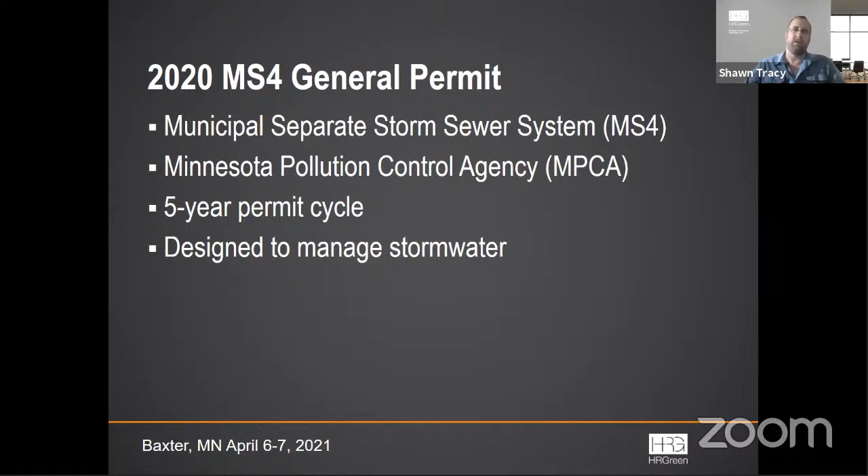So the permit, or SWPPP, contains a set of tools and programs designed to meet the permit requirements. The foundation of that is your city code. You've got a great city code - it meets the vast majority of the requirements. The only thing it's not meeting is the new requirements, which you'll have a year to address. They're very minor changes to your city code. The city code just lays out the regulatory language for erosion control, stormwater treatment, illicit discharges. It's got information for how you respond for enforcement of non-compliant projects within the city.

Currently, Baxter's not required to address any impaired waters. That's also part of the application process. The Mississippi River was recently listed as impaired for sediment. That listing came after the release of the permit application, so you're not on the hook this year for the next 5 years for addressing that portion of the permit, but 5 years down the road you will be. There's a little bit more to the application process that goes into that, but I'm not going to dwell on that right now. Suffice it to say, you want to be prepared for that for when the time comes.

The important takeaway about your SWPPP plan is that it's comprised of 6 what are called Minimum Control Measures, or MCMs. They're really designed to guide the city staff through various processes to meet the intent of the permit.

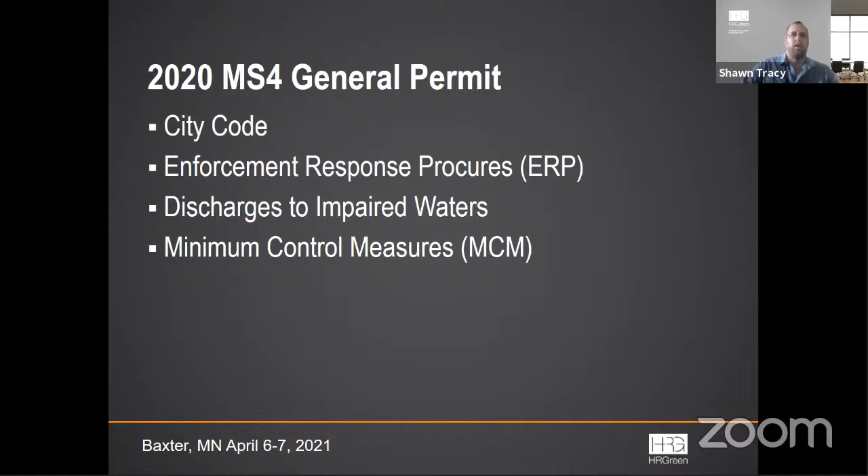There are plans for education and outreach to the public on stormwater related issues, a plan for getting annual feedback from the public on your SWPPP, and a requirement that the public has an opportunity to review and provide comments.

There's a plan for documenting the most likely sites and land uses that could generate illicit discharges, and that plan also addresses how to manage them. Think of your public facilities, buildings, etc., wherever you house likely pollutants, and how you apply things like road salt. This goes into MCM 3 for illicit discharge detection and elimination.

The other 3 plans relate more towards construction site plan reviews and inspections, site plan reviews and inspections related to permanent stormwater BMPs like stormwater ponds. And then the last MCM, number 6, has everything to do with plans for additional inspections and management of municipal facilities and stormwater structures within the city of Baxter.

Each one of the MCM plans provides essentially an introduction describing the intent of the MCM, along with specific details such as standard operating procedures and inspection content, what you need to be inspecting, and how you document what you need to be documenting, so that when you do your annual reporting, which is part of your SWPPP requirement, you have right at your fingertips all the information you need for your annual report, making it more efficient for you.

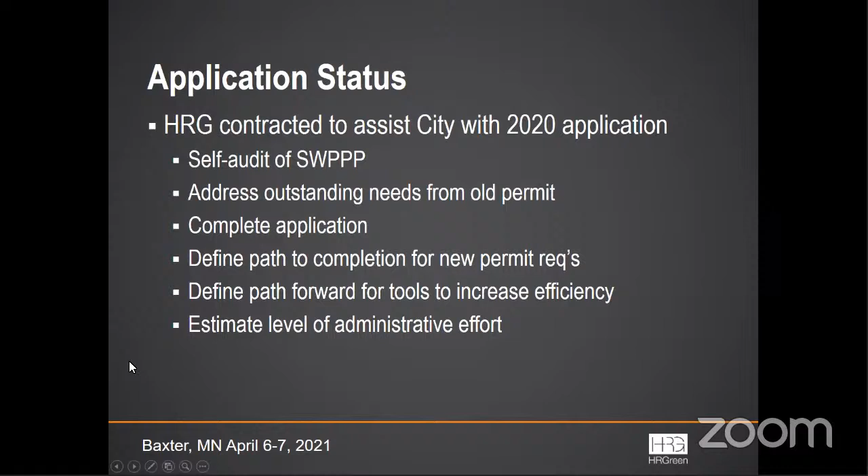This next slide shows basically the process of the application.

So far in this process, as I mentioned, we've all sat down with staff, and I've also worked remotely on addressing a lot of these things. The MCM plans, you didn't have a lot of very explicitly defined plans, so we worked hard to develop a plan for each one of those MCMs.

You should know that the city of Brainerd donated theirs as sort of go-bys, and we're working in tandem with Brainerd on a lot of these things with the city of Baxter. So there's some uniformity, some standardization between the two cities in some of the content, and in particular the MCM plans, or standard operating procedures, are a great example of that.

So right now we're at a point where the application is completed, ready to be submitted. The application deadline is the 15th.

What'll happen then is the MPCA will review it, address any concerns they may have with the application content, then we respond to it and resubmit if there are any comments. It'll go on public notice for 30 days after that point, and then the MPCA will make a final determination of the permit and initiate the activation of the 2020 permit.

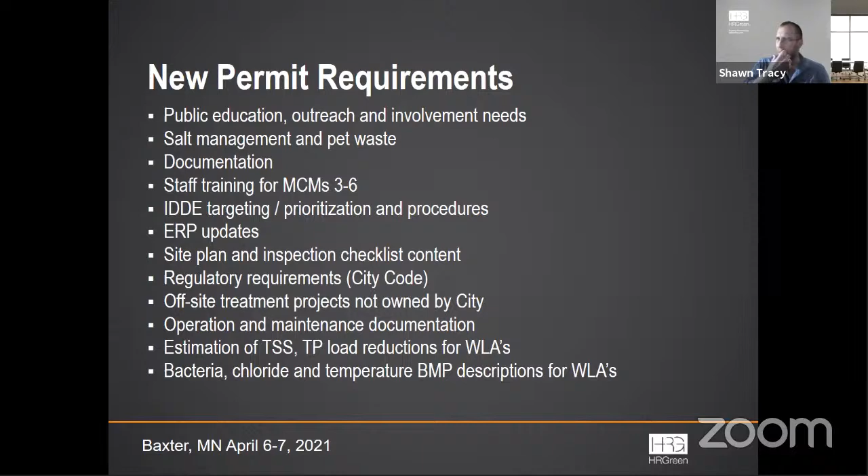The next set of slides focuses in on the various MCMs. There's a lot of content here, and I do not expect you to follow all of this. The take-home message is to illustrate that the staff and I have worked together to develop a work plan, an implementation plan of various issues we need to be doing, either for our SWPPP development or for when staff needs to go out and do various activities related to managing the program. You should have a copy of this and can look at it in more detail if you like.

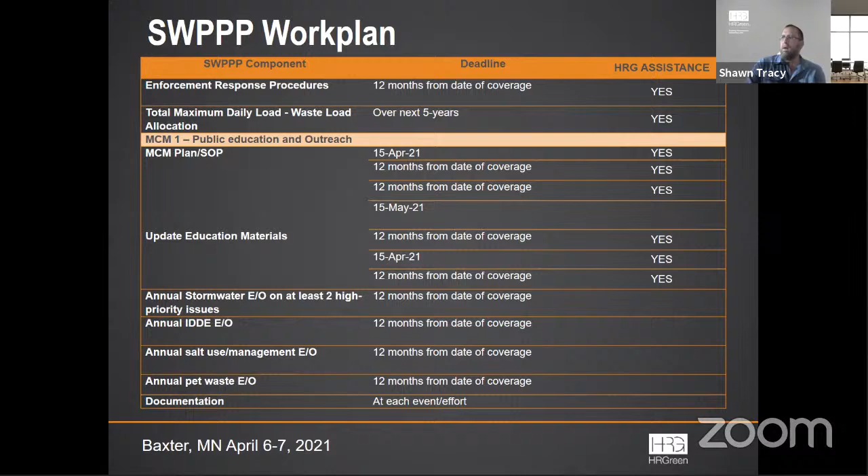So there's MCM1, the public education and outreach. There's various items there, components with deadlines. Some need to be done before the submittal, and that's already been taken care of. Some we want to get taken care of right away, like you'll see a May 15th deadline. The vast majority, though, are going to be related to items that can be addressed over that 12-month period to come into compliance with the new permit language. Again, the take-home message isn't for you to understand each one of these items, but to begin to understand the level of complexity and all the various moving parts related to managing an MS4. It's not a small task. There's a lot of small things, a couple of bigger items that require diligence in keeping track, documenting, and implementing.

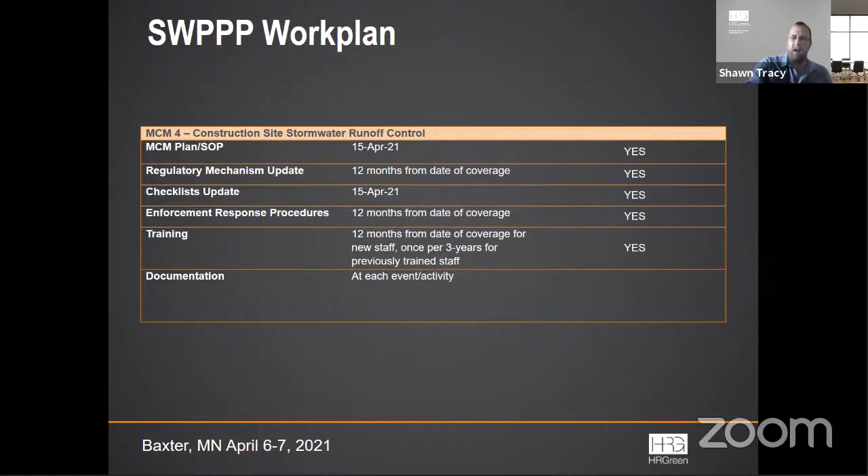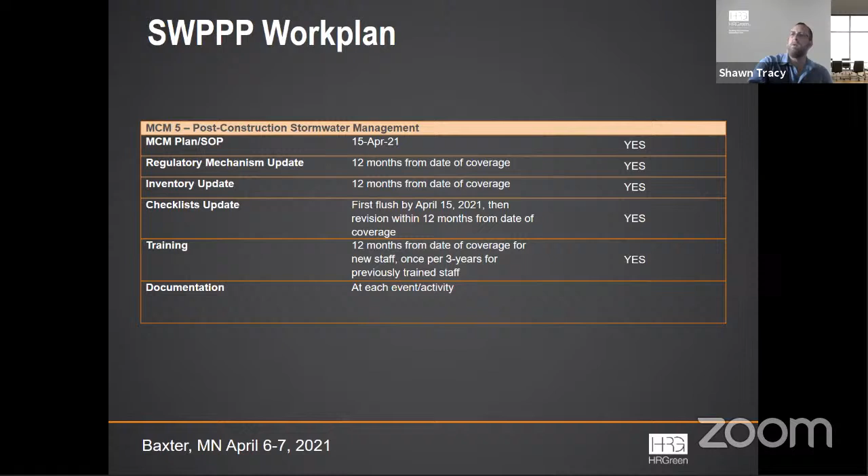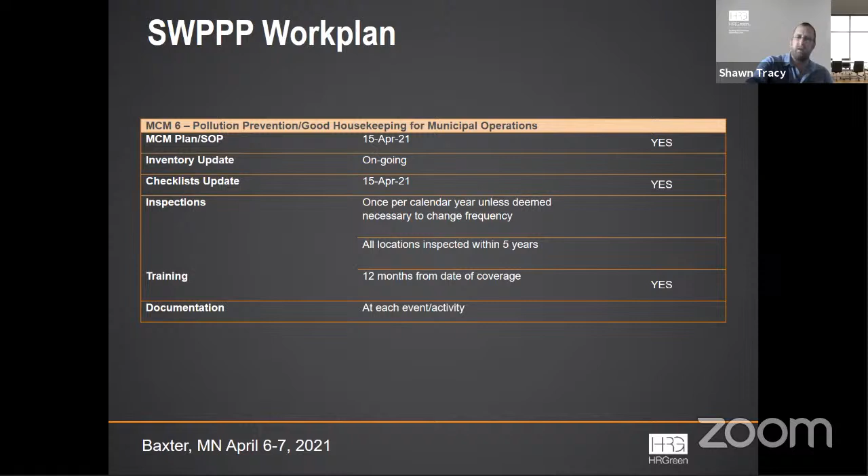In support of this table, we also have an annual implementation table for staff to use every year as they look at the year coming forward, what they need to do when, broken out by month. So there's a roadmap, a go-to that's much easier than guessing and having to read the exhaustive permit. You can just go right to that implementation timeline and understand when you need to do what related to your plan. At the end of every year, you review. One of the requirements is to review all the MCMs and decide if it needs to be adapted to meet any new needs. So the big question we needed to address was, what does it actually take to manage an MS4 permit program?

So we reviewed the time that Trevor Thompson spent over the year and made some projections based on what you just weren't able to get to because of staff time availability for old permit requirements, as well as doing our best to project what it might take for managing new permit requirements. As you go through time with this, now that you've got some tools in place to be even more efficient, these hours might reduce a little bit, but I can't really give you an opinion about what that might look like down the road.

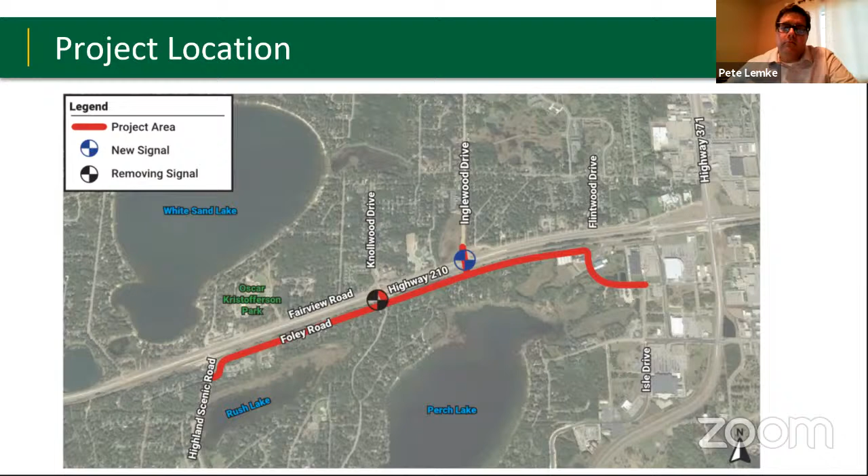This is a footprint of the project. I also have the layout with me tonight, if we have any questions we can zoom in. But I feel like you are all familiar with this - it's generally work on Foley Road from Highland Scenic Road over to Flintwood Drive. Then we're doing work at the intersection of Isle Drive and Flintwood Drive, and we are relocating the railroad crossing on Knollwood Drive to Inglewood Drive.

So with that, I'll move on, jump right into the layout. Generally we're going from west to east, and then in some areas, north to south. We have a lot of information to cover, but I think it might be best if you want to interrupt, ask any questions, or discuss something - just raise your hand, interrupt me, and I think that'll be best.

So from Highland Scenic Road to west of Knollwood Drive, the two main things happening here: we're doing a full depth reclamation, or FDR, and we're also going to move the road to the north to create a 5-foot boulevard between the road and the trail. The original plan had us moving the trail to the south to create that boulevard, but we think that's going to be less impactful to the trees along that area. We also think we'd have drainage issues if we try to move that trail south and impact driveways - we may be pushing water onto some of the driveways out there. So to avoid that, I think we have a pretty good solution: move the road north, create the 5-foot boulevard. You can see that 5-foot boulevard right here, here's the 10-foot trail, and here's the road.

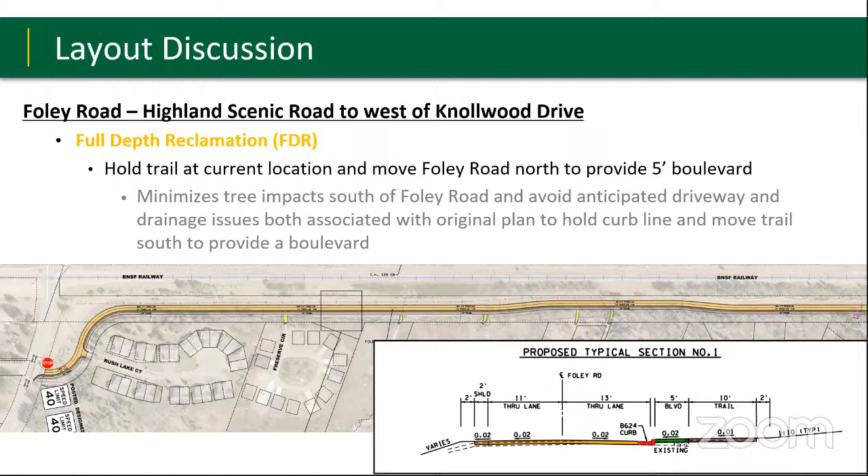Peter, does that mean we're narrowing the current street to a narrower street? We are. What's the current width of the street right now? I'm going to jump to the next slide, Trevor. I'm not sure, I'll have to verify that, but I believe it's 32 currently. Can I get back to you on that? I think we show it in the next slide with the typical sections, or future slides. You can see here - this is another representation that the existing curb is here, the new curb is going to be here, the trail remains where it is, and then we slide everything to the north.

Can I just jump in, Peter? You made a comment earlier about how we may have all this memorized, and I don't think you should make that assumption. This has been talked about for so many years that I think you need to be methodical and help all of us refresh our memories as we go along this project. Okay, yeah, I can do that. And if I'm going too fast or skip over something, absolutely let me know.

This is the 5-foot boulevard we're creating, consistent with the ADA transition plan the city has developed. We're going to salvage as much of the existing road material as we can, which is what an FDR does. There are catch basins along Foley on the south curb line, but they all just drain to the north, and there's no drainage along Foley. So it's cost effective to move that curb line, put in new drainage, create that boulevard, preserve and protect the trees, and avoid drainage issues with the driveways. It's a nice solution with a lot of pluses.

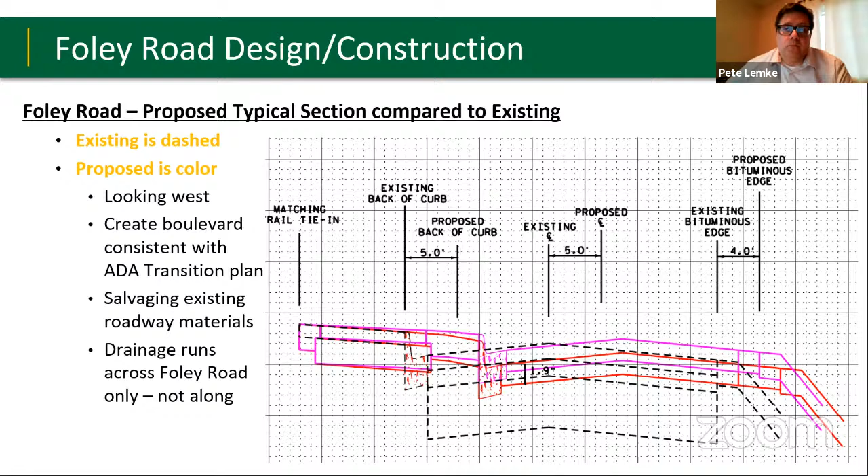Now we're going to move east a little bit, to the Knollwood intersection with Foley and Trunk Highway 210. There's a few things going on here, so I'll try to explain them, but raise your hand if you have questions. Currently Knollwood Drive is at Fairview, 210 and Foley Road. The current plan is included in the layout tonight, consistent with the city's long-term planning, and it's paid for with MnDOT LPP funds — local partnership program funds — which are in hand.

I'm going to jump to the next slide. Basically, we're going to cut the crossing off here. That gets relocated to Inglewood, and the signal gets removed. We're going to remove this little bulb on Foley, and Foley becomes a T intersection. We're also going to remove the pedestrian features and take the crosswalks off of Trunk Highway 210, because there's no crossing here anymore, so there's no need for a pedestrian facility. That's what's shown on the screen — what's in the plan, what's funded by MnDOT, and what we want to move forward with.

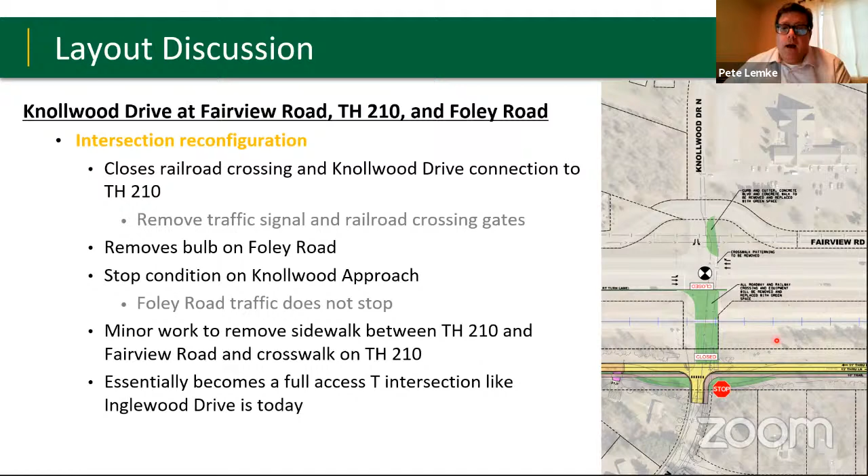But related to that, MnDOT, as a separate effort, is developing the MnDOT Trunk Highway 210 corridor study through this area. Out of that study, they're recommending an RCI, which stands for Reduced Conflict Intersection. That's generally where you don't take left turns and don't go straight across from the side street — you take a right turn and do a U-turn to accomplish your left turn. I'm going to jump to the next slide and show that.

So basically, we're still teeing Knollwood at Foley. The railroad crossing is removed, and the signal is removed. But there's a 3/4 left going north. And if you're on Knollwood and want to take a left to go east, you would take a right, do a U-turn here, and continue on your way east. This preserves all the movements of the planned layout, but adds some safety features of an RCI — I feel like this is MnDOT's ultimate solution.

One thing related to this — I'm going to jump back one slide. City staff and council have not yet received a draft of the Trunk Highway 210 corridor study. I know there's a lot I'm trying to explain here, so hopefully it's coming across. Once you get that, you'll be able to comment on it. I'm going to jump forward.

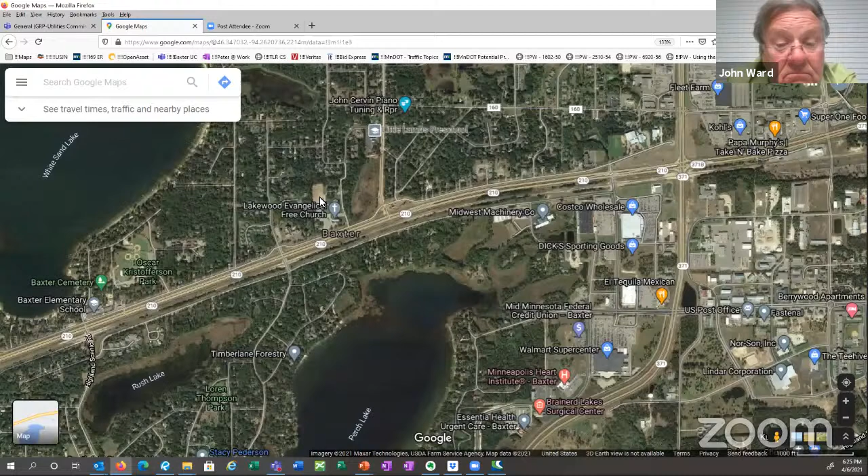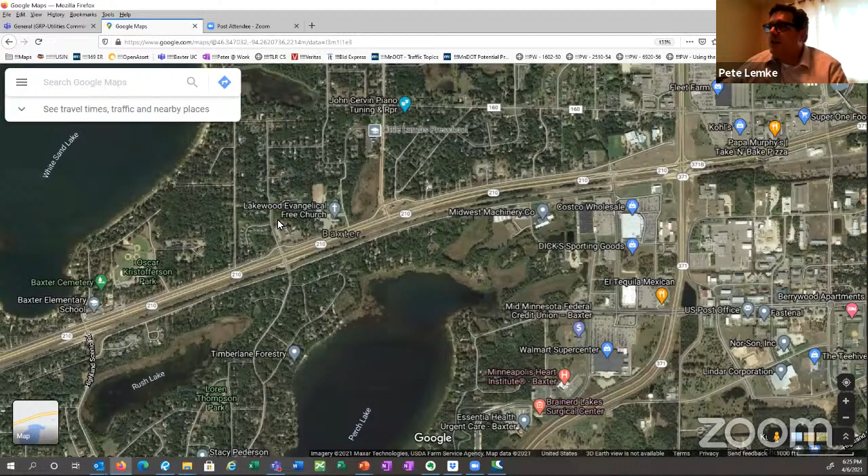Mayor, council members, I think MnDOT would be reluctant to do a roundabout there, especially since their forthcoming 210 study is going to recommend an RCI there. I just think they'd probably be reluctant to do that, but I wouldn't be opposed to engaging them on that question, asking for more information about why if that's something they would or wouldn't want to do.

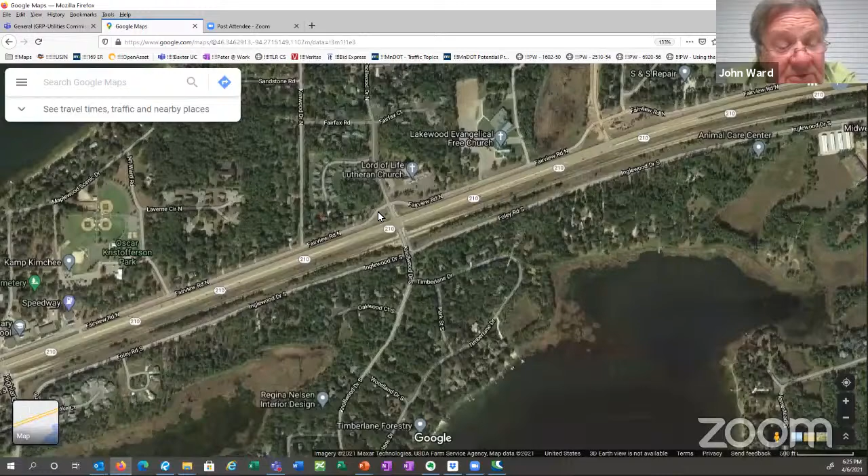What about closing off the whole access on the north and south side? What would be the answer to that? So MnDOT would love that. MnDOT would not have a problem at all shutting off the access to 210 on the north side at Knollwood. They would agree to that in a heartbeat.

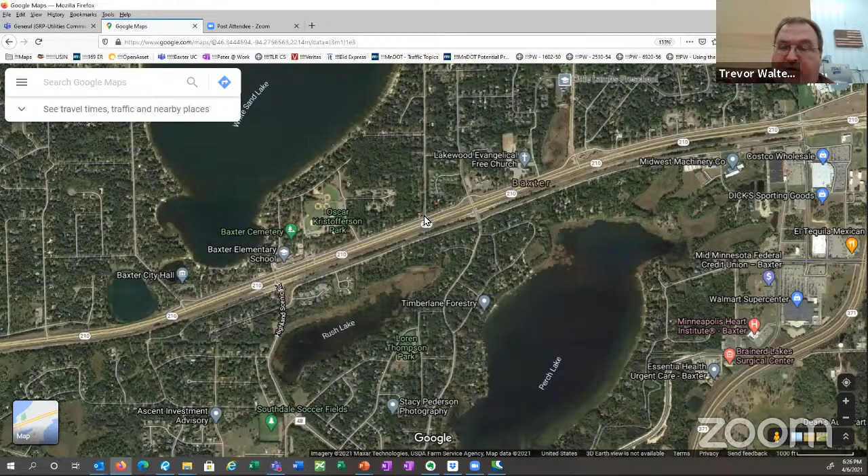I think Trevor, I'll add another point to that. I don't think MnDOT in their study saw many issues with leaving it open. I think they wouldn't mind closing it, they'd want to close all access points to some degree, but I also don't think they saw any issues with leaving it open.

I think it's beneficial to the city. We did a traffic analysis, you can see it in the memo, Councilmember Ward, that was in your packet. Considering Lord of Life Lutheran Church and Lakewood Evangelical Free Church, we made assumptions about when they would exit, and assumed that traffic would come up to Inglewood, because folks wanting to go east probably wouldn't want to go all the way down to Highland Scenic to do a U-turn.

In the scenario with weekday signal timing, it didn't function very well. It was level of service F, and the level of service is a measure of delay at an intersection. The delay for these movements was quite high, in like 300 seconds, which is a long time to wait.

We did run it where we adjusted the signal timing here to favor this, and it got better. I'd have to look at the memo, but I think it was still level of service F, so generally unacceptable.

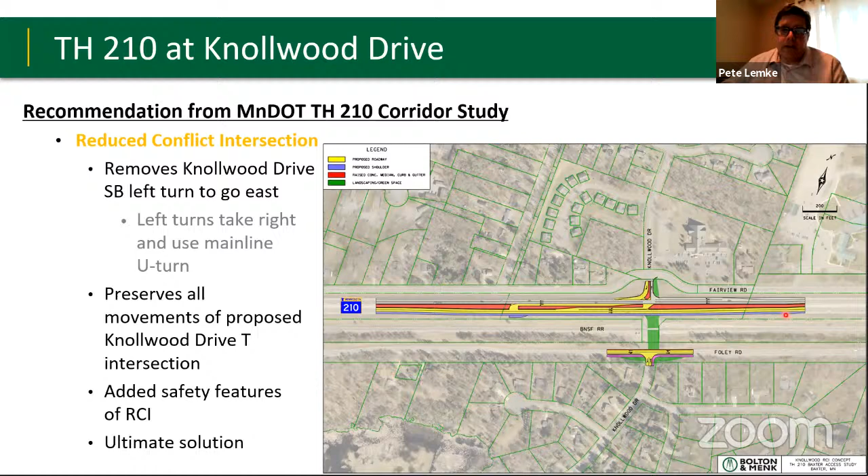There's just all of these considerations that we need to think about. But that's what you mean, Peter, by leaving it open and access to 210. You're not saying that they're going to allow it to stay open like Inglewood and 210 is today. They're gonna require something somewhere in the near future, such as this RCI. Yes.

I just want to be clear - you say leave it open, and leave it open to me and probably the city council means just leave it open as it is at Inglewood today. Why can't Knollwood stay the same as Inglewood is today? Just take the signal light and move it from one intersection to the other. And MnDOT, I don't think is going to allow that.

Pete, correct me if I'm wrong, but it seems like MnDOT with these corridor studies is really pushing the RCIs. Based off the conversation we had with them, they kind of wanted an RCI at Inglewood, but we pushed back with the fact that it's a pedestrian crossing and we didn't feel an RCI was sufficient for pedestrians. But otherwise, their traffic studies, for the most part, quite often come back with a recommendation of the RCI. Yeah, it is definitely a tool in their toolbox that they like to use.

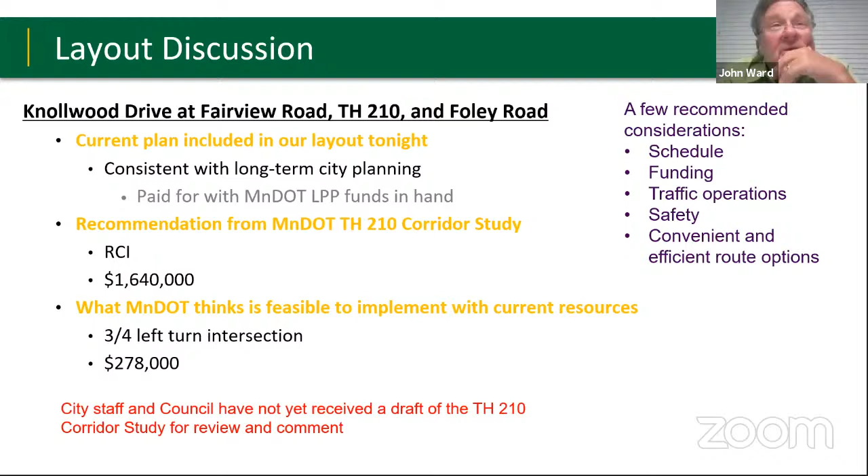Well, let me throw another thing, if I may. I was involved with one of these up in Nisswa on 371 a few years ago when I was in the state legislature. Let's just say that somebody on Knollwood Drive needs an emergency vehicle, whether it be a fire truck, police truck, ambulance, whatever. It got into a lot of discussions about emergency access to different areas.

So if you close off Knollwood on the south side, is that going to delay emergency vehicles getting to those people that perhaps need one? And Trevor, that's the point you just made about taking the light and moving it over. That was a heavy discussion that we got into on 371, doing the same exact thing.

And I know what MnDOT wants, I know what MnDOT demands. But the fact of the matter is there's a certain number of people in the area I'm speaking of that will not have the emergency service response time that they should have when these things are done that MnDOT wants done. And I'm very serious about that.

If you follow my rationale and my input. And are you following that, Peter? What Councilmember Ward's question is? If a fire truck or ambulance is coming from the 371/210 intersection and they want to go southbound

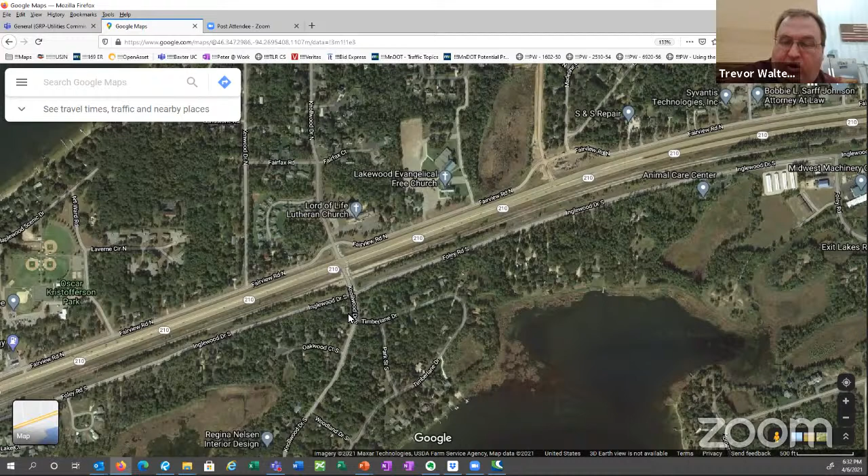on Knollwood, is the response time going to be the same, less, or greater? Driving down 210 to Knollwood, they're coming from the 210/371 intersection, coming south. Versus with our proposed project, you would come down 210, come onto Foley, and then take Foley over to Knollwood. Correct.

It's a good question. I'd want to maybe contemplate that a little more.

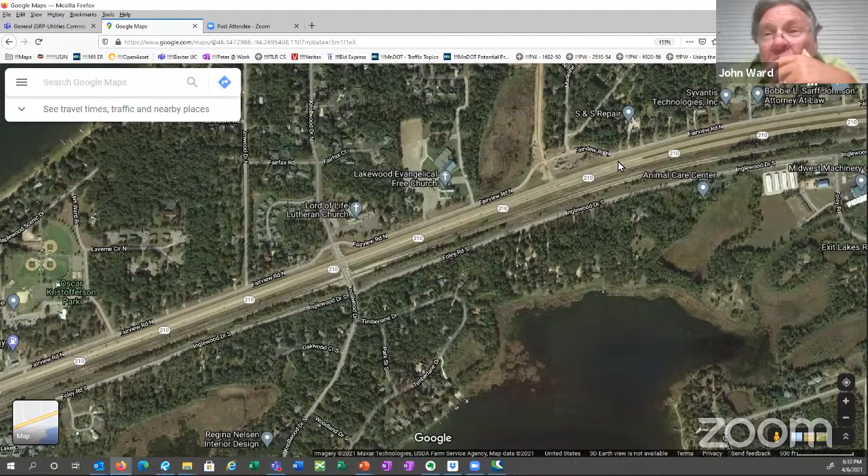Peter, if I might, let me throw this in as well, because we actually had trial runs trying to have a fire truck make that U-turn. Think about that now. Having that fire truck make that U-turn for those people to access, whomever down there, it was impossible to do. So I wanted to throw that in as well.

Councilmember Ward, just to add: they're not going to be making a U-turn. They're going to turn off at Inglewood, get onto the service drive, and then go west. So I think there will be a reduction, but it's going to be seconds. That's just my opinion.

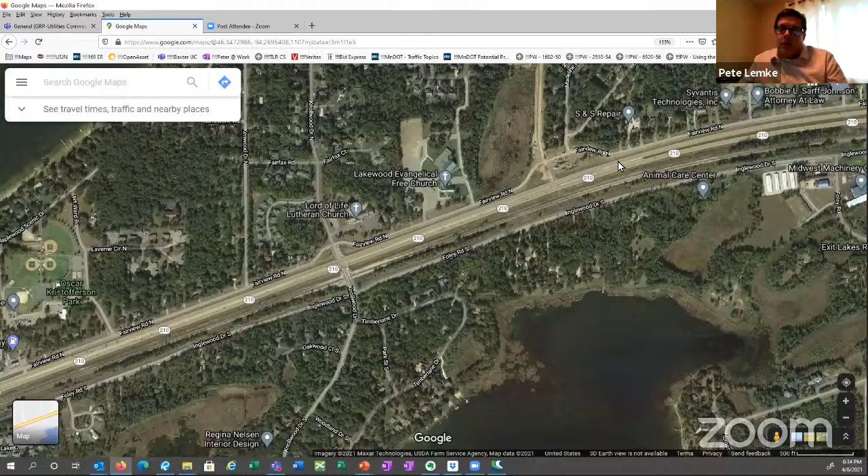I don't think it'll be much longer response time, but I think Peter should run the numbers and get a memo back to the council on it. I think it might be good to get input from the Baxter fire chief too, just being an expert at that, that's what they do. He may say, yeah, that's a concern, or it's not really a concern. Use whatever resources you need to, Peter, to write them a memo.

Could I add something to that real quick? Sure. To Councilmember Ward's question about the response time: does it also come into play for an ambulance getting back to Brainerd? Because we talk about a 3/4 intersection there at Knollwood Drive.

And if you've got somebody on Knollwood Drive that needs emergency medical attention and needs to head back to Brainerd, now they're heading all the way down to Highland.

Trevor, you're cutting out. I understand what he's saying. Hold on, Pete, let me make sure we clarify. Turn around, or Trevor, they have to travel - we can't understand you, Trevor. Mute Trevor, Kelly, mute him.

Frontage road. So maybe that's an argument the city can use for leaving that as, we'll call it, a full intersection.

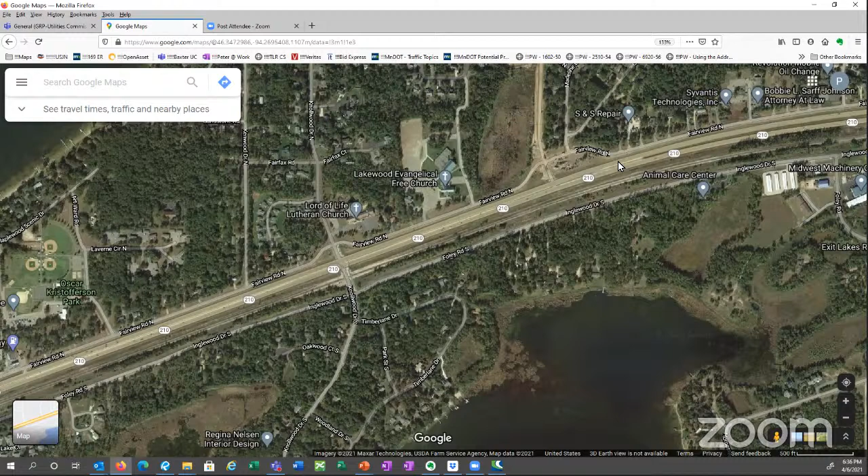We already need to look at an ambulance or a fire truck coming out of Knollwood and heading back into Brainerd, especially an ambulance. An ambulance having to make either the RCI or go all the way to County Road 48 and do a U-turn, because they're not going to know enough. They're just going to come into the intersection. They're not going to know enough to take Fairview down to Inglewood. So we need to look at both scenarios, Pete, is what we're getting at.

Absolutely. Trevor, if I could make one comment on that too, just from a human factors point of view: I'll admit it, there's days I might not want to go down to Highland Scenic to do a U-turn, and I think people would see it as maybe inefficient, and we may be enticing folks to just bypass the 3/4 left, going against traffic, and that's not something we want to entice people to do. So I think those are both kind of connected.

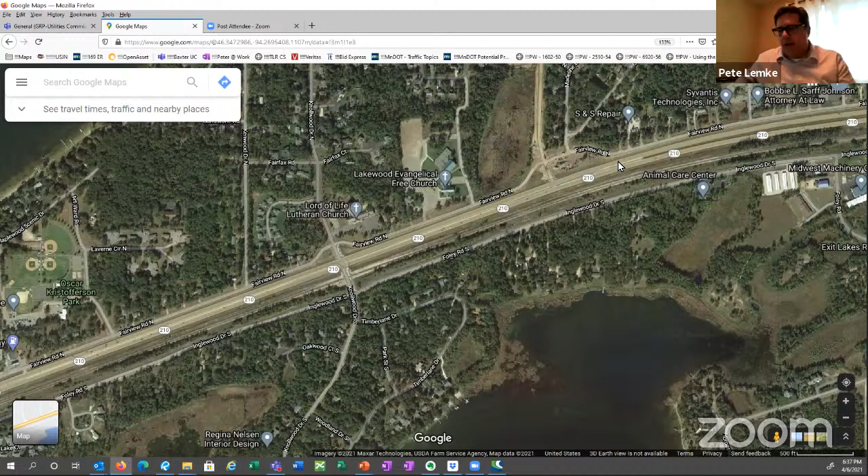Why make the ambulance go way out of the way, but folks might not want to do it either, and if no one's around, they might just do it. So I think by showing that the ambulance takes longer to get back into Brainerd to the hospitals, that's a reason to leave it exactly the same as Inglewood and not put any 3/4 or RCI in, just leave it as a free-flowing intersection. I don't think the traffic counts are going to be high enough that it's going to hurt anything.

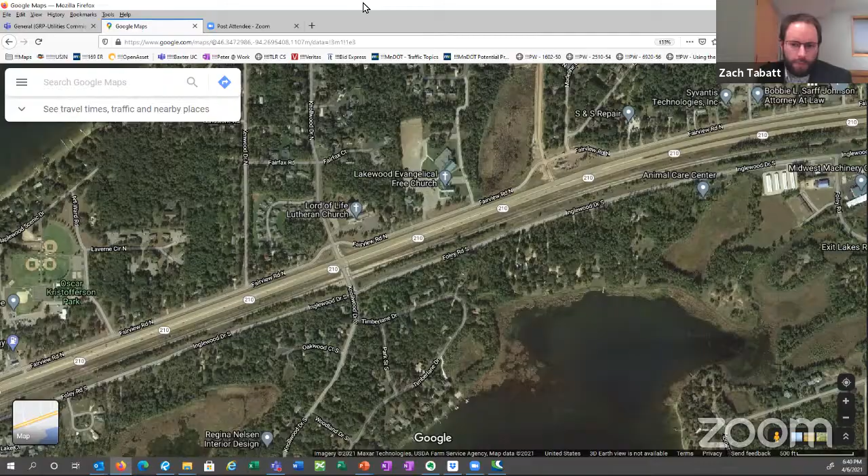But what I was trying to figure out here is on this slide, actually. This one, keep it here. Yeah, okay, I just wanted to check the backstop on all this. I thought I heard implications that there's a lot of discussion before any of this would happen. But what I was hearing you, from the engineering point of view, mention was it sounds like MnDOT can basically tell us we are going to pay for the improvement inside of their roadway, or was I misunderstanding that?

I think you have it right. MnDOT can do whatever they want on their road. They probably need city concurrence to put it in our plans, but that would then impact how we set up our plans based on what they want to do. I feel like the city and MnDOT have a good relationship, so Trevor should give input on this. But I think if it's something the city wanted to do on a decision maker level, like at the council, and MnDOT wants it, I think staff would for sure implement it. It's just some of these considerations I have here, it would impact that. But to your question,

Council Member Tabatt, is that MnDOT pays for this. Okay, what they're doing right now, though, is they allotted 1.2 million for all the improvements on Trunk Highway 210 that we proposed to do at Inglewood and Knollwood. And what they want us to do is, they don't think we need the 1.2 million to pay for everything, so they want us to pay for a 3/4 access at Knollwood out of that 1.2 million. In the sense then that we would be paying for it in this case, because we've done a cost estimate on the improvements so far.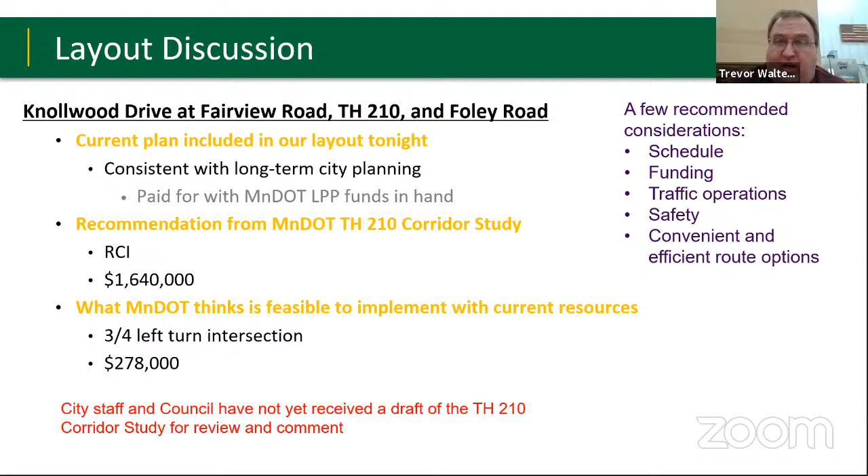So there's a lot of things going on here. We're trying to get the Inglewood Drive built next year, but MnDOT is also pushing some stuff that isn't approved by any bodies yet. It ain't approved by MnDOT. It's not accepted by the city of Baxter. They've got some big improvements at Knollwood and 210, and some minor improvements at Meredith and 210.

There's a proposal to take the 4-lane out, so there'd be no 4-lane after County Road 48 out to the west city limit lines. It'd go back to a 2-lane in order to get an acceleration lane at Knollwood. There's a lot of things going on that's coming at the council in that report.

Trevor, I know that we're short on time and we may need to continue this at the next meeting, but can I try to get through the presentation so the council has a first look at everything? Sure, and definitely ask questions if you have any.

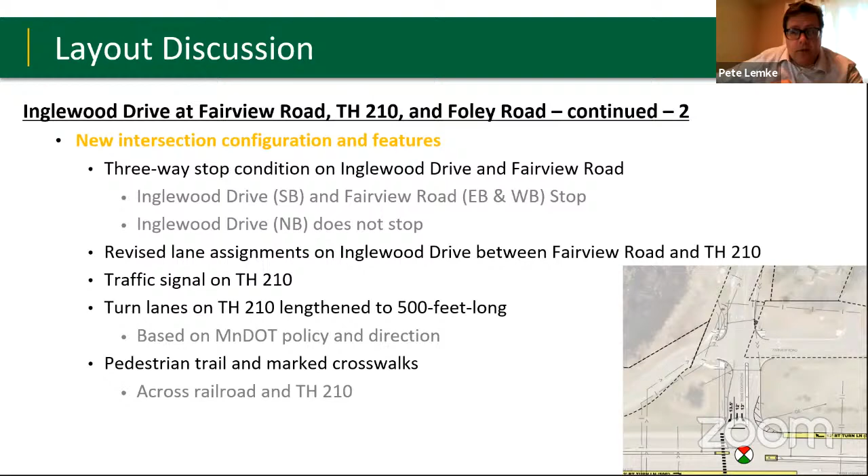Let me see, did I grab everything? Yeah, I think that's generally it. I'm going to jump to the next slide. This is more information — we're relocating the crossing to Inglewood.

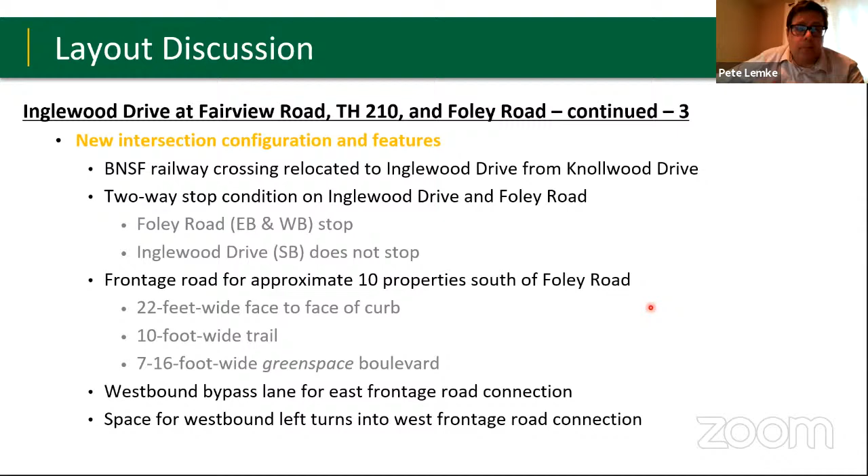It's a two-way stop condition on Foley. So if you're on Foley, you stop. If you're coming off of Trunk Highway 210, you just keep going to Foley and make your left turn or right turn and go on your way. This area through here is going to be 22 feet — I'm sorry, the frontage road is 22 feet face to face of the curb. There is a boulevard area between the frontage road and the trail, and between the trail and the roadway. We do anticipate there would be space there for trees or landscaping, some beautification along that corridor.

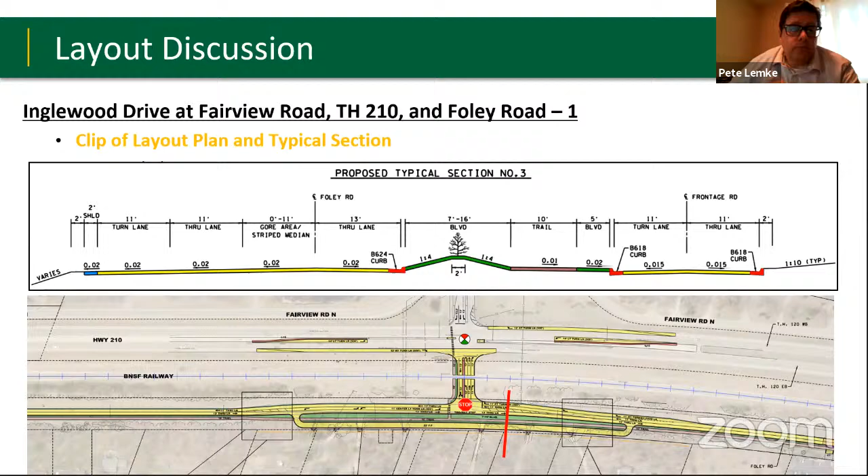We looked at the traffic operations here, and it's included in the memo. It'll be expanded upon in the ICE report, but we think it's going to function pretty well and be a nice improvement. I like to call it right-sized - not more than is needed, but adequate. In the context of an urban area, it may get busy sometimes, but that's what you'd expect in Baxter in the summer.

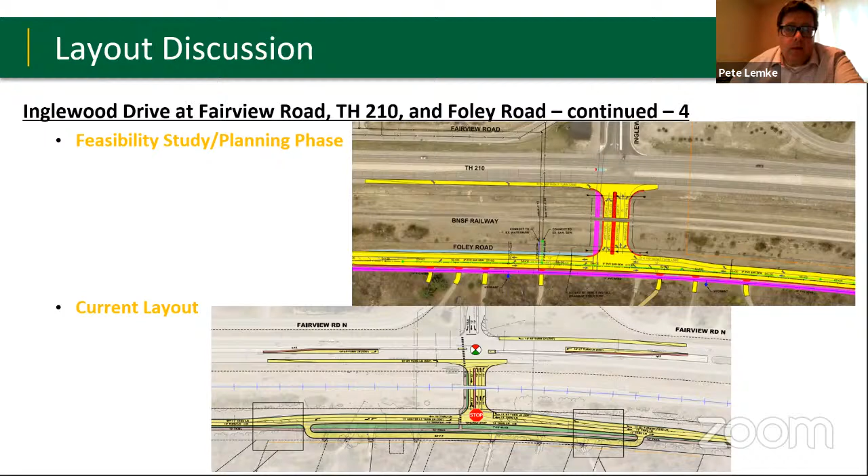So continuing east, generally from Inglewood over to Forthun, it's FDR with trail improvements, and it's a stop condition on Forthun Road.

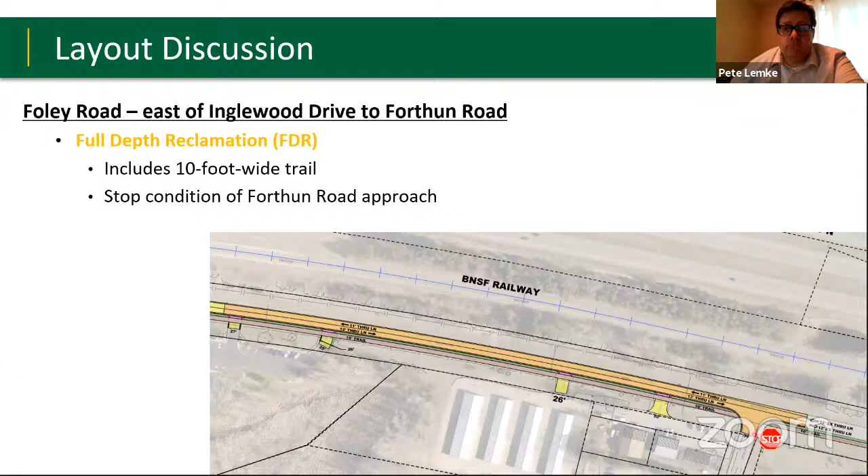Next, east of Forthun, we're going to extend the trail, the 10-foot wide trail, and make ADA improvements along here. I feel like this extension makes sense because it does a nice job of getting folks down to the commercial area. This is Elder Drive right here, and then just on the other side of that is Home Depot.

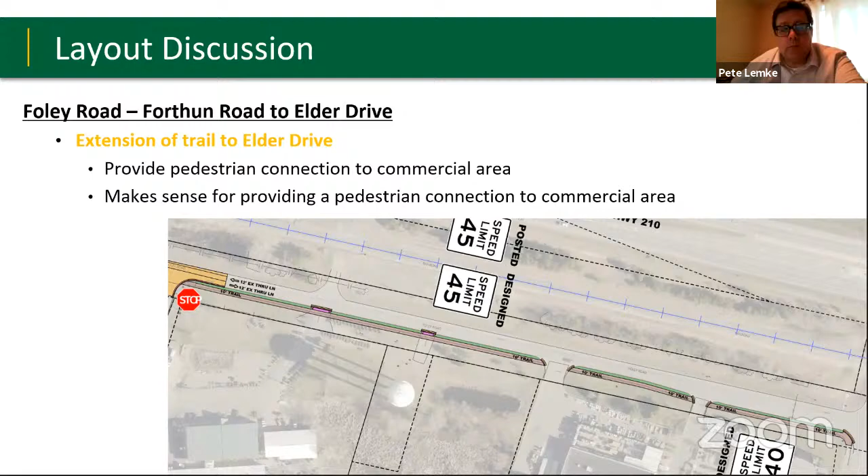The last improvement we have is just for Forthun Road, Isle Drive. It's going to become the through movement, and this is consistent with the long-term city plan for making that west side road connection along the entire city of Baxter. Then the east leg of Forthun Road would tee in, and it would be a stop condition.

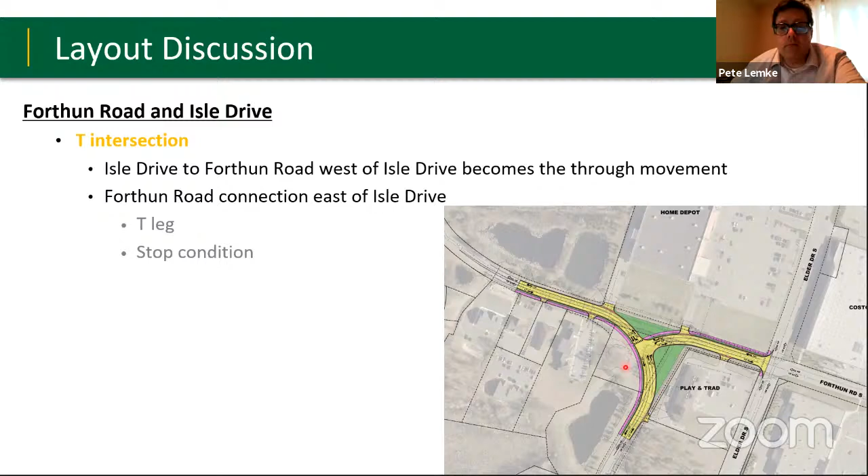We also briefly looked at making that a roundabout. It is consistent with what you see on the corridor further to the south on Isle Drive. Although the intersection as a T does not experience delay at all - as a T intersection it operates at level of service A, which is the best you can get - this is also a nice improvement that the council could consider for this intersection.

Mr. Cross? Yes, just one question. If that's going to be our through road from basically the north all the way to the south, what happens when this crosses Glory Road? Are we going to change that stop sign configuration to make the north-south be the through road?

I think that's a question Trevor should answer. I don't know if we would do that with this project, and we would definitely want to run warrants on that if that's something the council would want us to look at.

Well, you now have a roadway that basically goes all the way from Pine Beach down to Mapleton Road with only a stoplight on 210. Well, there are some other stop signs in there, but no, I appreciate that comment - that's a really good comment about what happens.

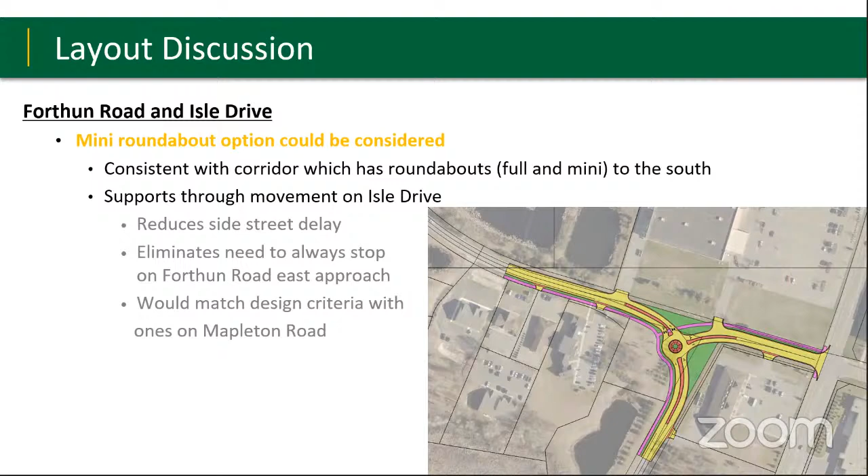Yeah, no, absolutely. And Trevor, maybe that makes sense to have a paragraph or just a recommendation in our ICE report about that, since the ICE report concentrates up here over on Inglewood, but we also talk about Forthun and Isle, and Knollwood and Foley. We could certainly talk about implications down here. We'll come back with an update memo to the council on it.

This just reiterates that we're looking for council consensus. It allows us to move forward and dig into some of the additional work that we need to move this project forward. And with that, thank you very much for your time, and more discussion and questions.

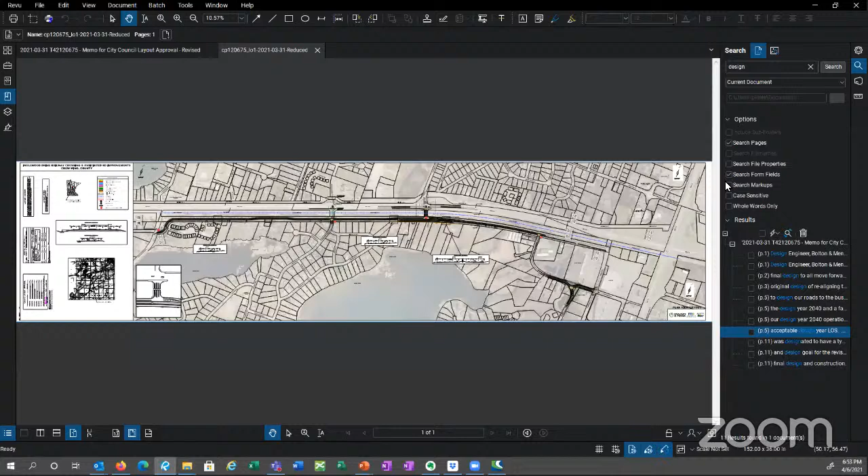Any last minute suggestions or comments, Council, before we? Mayor and council, there were enough questions asked tonight that I think staff and consultants need to come back with some more information. So I don't think we're ready to say we have consensus on this layout, that's my opinion.

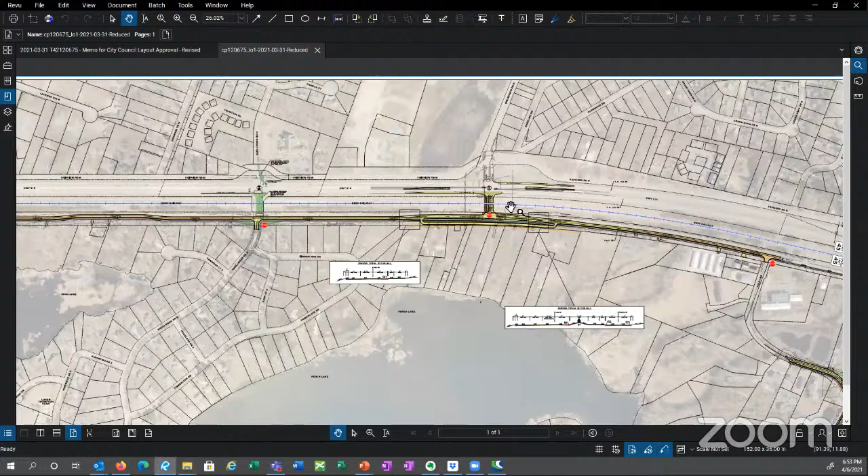So I think we should bring it back to the next workshop, if that's possible, Mayor. I'm fine with that, I don't want to rush things either. So if we've got the time, I think that's best. Yeah, I appreciate that we're moving quicker than we have been to get that input and so on. And this is definitely a great first start.

Thank you, Mayor. Council, if you think of something during the meeting, we still have council comments and administrator's time that we can talk about it also.